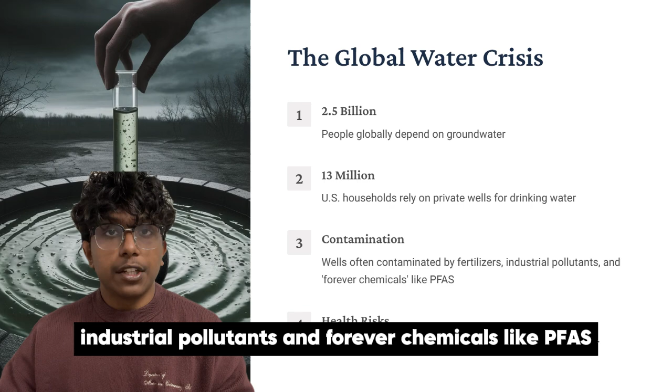Globally, 2.5 billion people depend on groundwater, and in the US alone, over 13 million households rely on private wells for their drinking water. But unfortunately, these wells are often contaminated by fertilizers, industrial pollutants, and forever chemicals like PFAS. These contaminants can lead to serious health risks, including developmental issues all the way to cancer.

Current solutions either cost too much, like reverse osmosis, or don't effectively remove nitrates and PFAS, like off-the-shelf carbon filters. This gap in the market creates an incredible opportunity for an affordable, easy to maintain, and environmentally friendly filtration system specifically designed for well water.

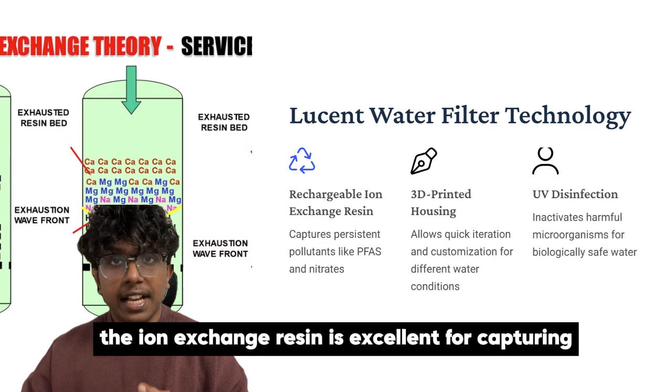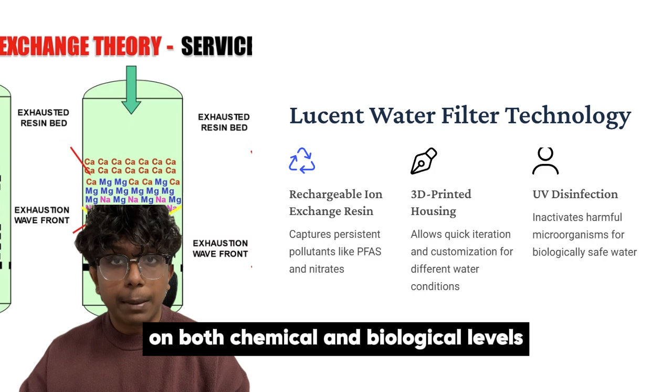Our Lucent water filter combines a rechargeable ion exchange resin with 3D printed housing and UV disinfection. The ion exchange resin is excellent for capturing persistent pollutants like PFAS and nitrates. Meanwhile, the UV stage inactivates harmful microorganisms, ensuring that the final output water is safe to drink on both chemical and biological levels. We chose to 3D print our cartridge because it allows us to iterate prototypes quickly and customize

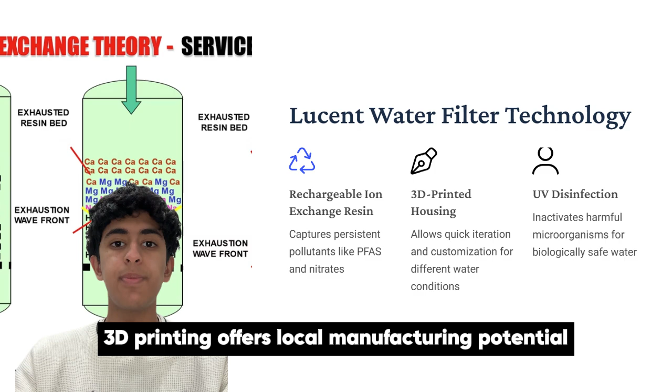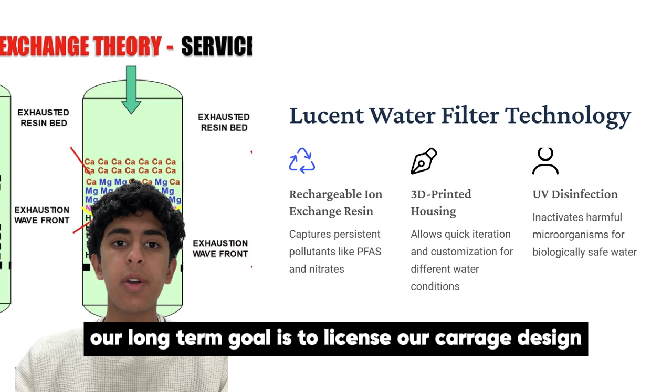designs for different water conditions. 3D printing offers local manufacturing potential, particularly useful in rural regions where centralized production or long shipping times can be a challenge. In fact, our long-term goal is to license our cartridge designs so that local groups or individual consumers with 3D printers can produce parts on-site if they prefer.

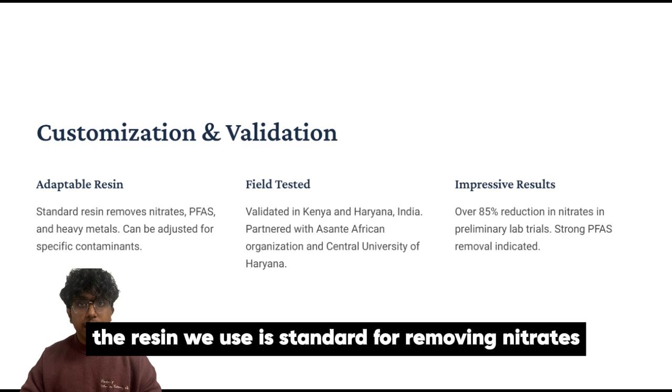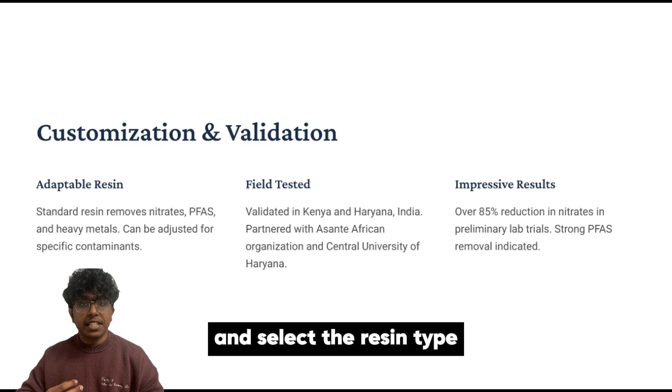The resin we use is standard for removing nitrates, PFAS, and some heavy metals, but it can be adapted for different contaminants simply by adjusting the resin blend. Users can conduct a local water test through often state or county programs and select the resin type best suited for their own water quality needs.

We're proud to say Lucent has been field tested in both Kenya, Africa, and Haryana, India. Our biology teacher helped us partner with the Asante African organization, where we sent them our product to test with their well. Additionally, the Central University of Haryana's Environmental Science Department helped us validate our product.

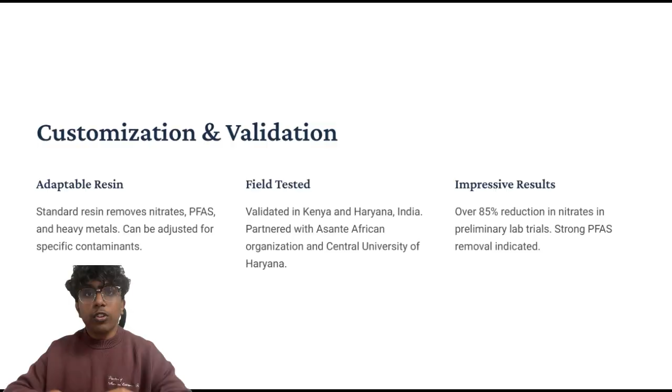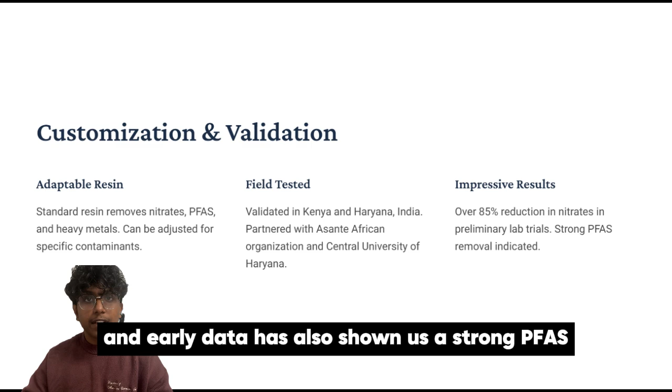We've built and tested multiple prototype models, iterating to optimize for both efficiency and user friendliness. In preliminary lab trials, we've seen over 85% reduction in nitrates, and early data has also shown us a strong PFAS removal rate. We've also added a UV component to address the microbial load, and we plan to use third-party testing to confirm virus inactivation rates.

Our total addressable market in the US is roughly 13 million households relying on private wells, which translates to a potential $1.95 billion if we price each unit at $150. Within that, our serviceable available market includes 2 million households at high risk of contamination, valued at $300 million. For an initial serviceable attainable market of 100,000 adopters, we're looking at approximately $15 million in revenue.

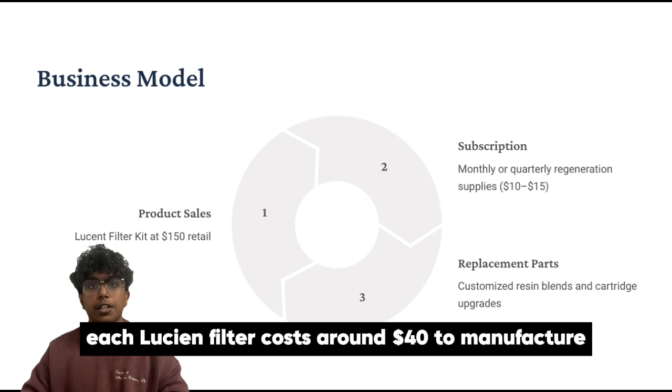Each Lucent filter costs us around $40 to manufacture, which includes resin plus housing materials, and this allows us to retail at around $150. We plan to reach rural communities through direct-to-consumer online sales aided by education-focused marketing, such as how-to videos, brochures, and local workshops.

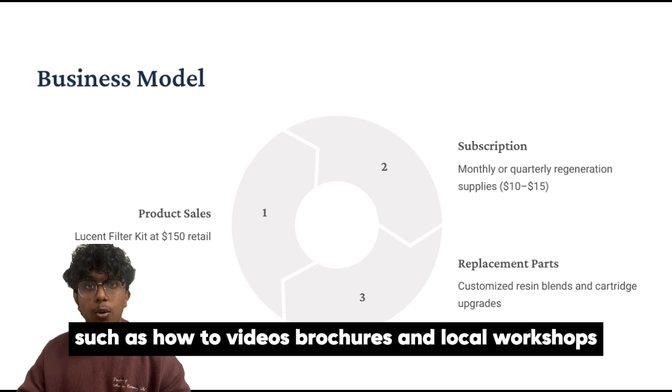We also will partner with local farm bureaus, nonprofits, and rural cooperatives to subsidize and distribute our product to remote areas. Our business model rests on 3 main pillars.

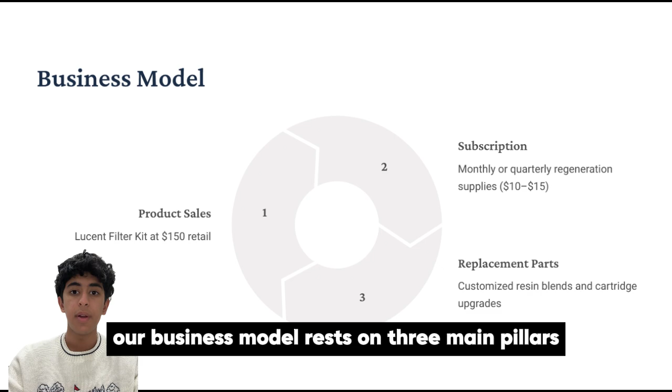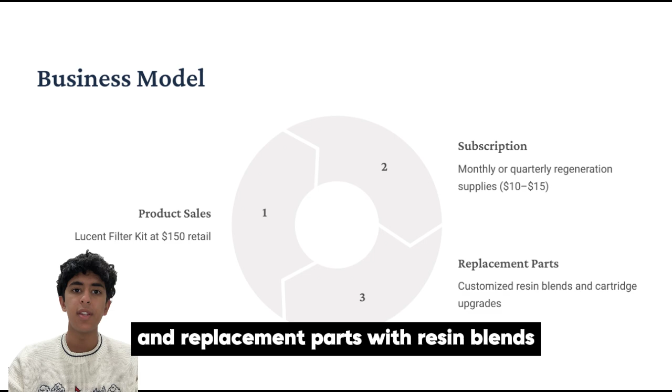Product sales, which includes a Lucent filter kit with housing, resin, UV stage, and instructions; the monthly or quarterly subscription with regeneration supplies; and replacement parts with resin blends customized for local water conditions and optional cartridge upgrades. Because the filter is regenerable, the ongoing revenue stream from replacement and regeneration kits extends customer lifetime value.

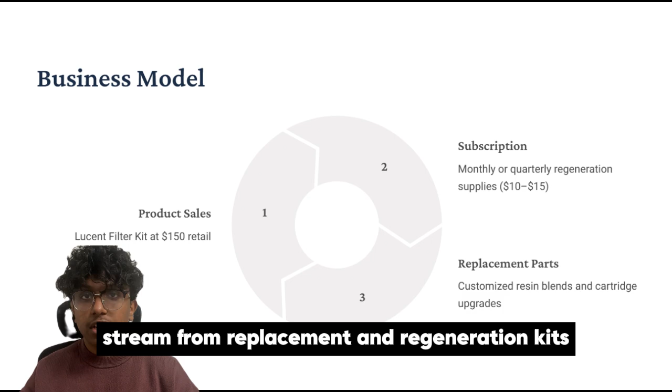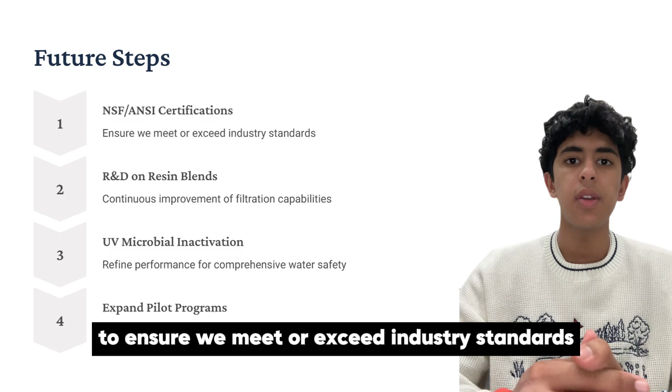Coupled with an affordable initial price point, we aim to make a compelling return on investment case for both ourselves and our end users. Part of our fundraising covers NSF and ANSI certifications and related testing to ensure we meet or exceed industry standards. Moving forward, we'll continue R&D on resin blends, refine the UV microbial inactivation performance, and gather more data through expanding our pilot programs.

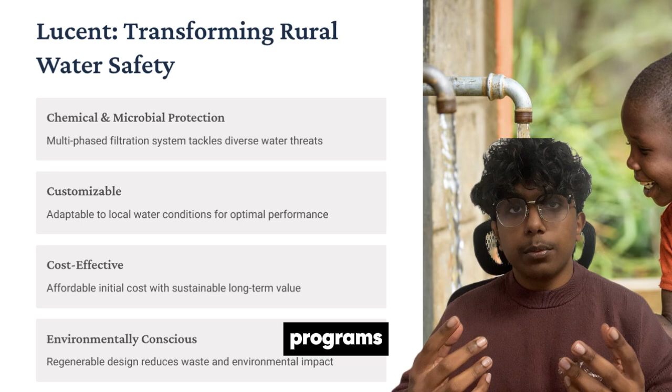In summary, Lucent tackles both chemical and microbial threats to well water through a multi-phase filtration system that's customizable, cost-effective, and environmentally conscious. Thank you for listening to our pitch.